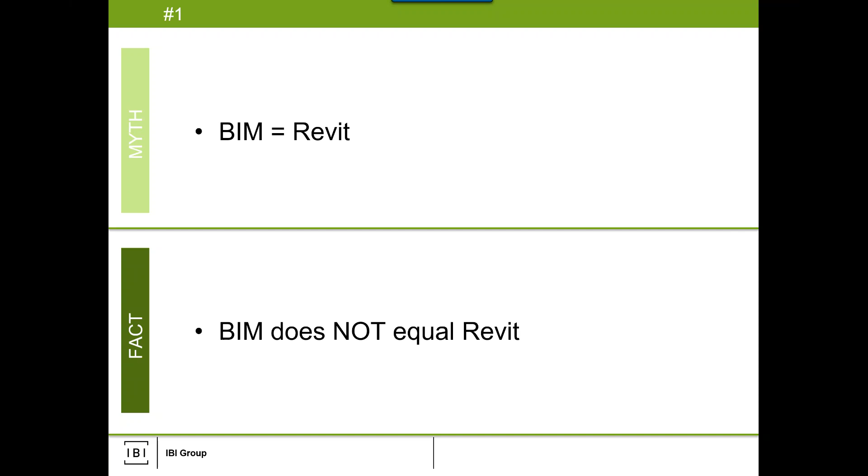So with that, we are going to jump into our first myth, and this is by far the most common myth that I hear all the time, and that is: BIM is equal to Revit. So all of these — I have 14 myths — it'll be myth and fact. And the fact is quite simple: BIM does not equal Revit, period. BIM never has equaled Revit, and it never will equal Revit. That's a very critical thing — if that's the only takeaway, let that be the takeaway. BIM does not equal Revit.

And some of the things, if you listen around your offices or the industry, you'll hear some of these. Did you install BIM? You don't even know what that means, other than — well, did you install Revit?

Well, then ask that. One of my other favorites, and I've worked in the UK many moons ago, the UK mandated Revit. That is the farthest from the truth. If you're interested in the UK BIM mandate, it's an amazing collection of documents under British Standard 1192. Give it a good read. I don't even know if it mentions Revit in the documentation, but I could be wrong.

But the mandate is the application of the BIM process. Learning Revit means learning BIM. And I'm sure we've all heard that in some form, where we say, yep, we do BIM because Revit's on the computer. Or, I took a Revit training course, therefore I know BIM. Can't do BIM because no one has Revit installed. BIM doesn't apply because we're not using Revit.

And I've heard that fifth bullet quite a bit, especially for non-architectural types of projects, which we'll touch on in a bit. The second last one was interesting because I've seen some RFPs that said, do BIM in some form or another, right? And the response was, well, we don't know how to. It's a civil project, it's a rail project, it's a transit project. It's got a whole bunch of components that we wouldn't use Revit for. Therefore the RFP doesn't make any sense, because of that immediate association of BIM equaling Revit.

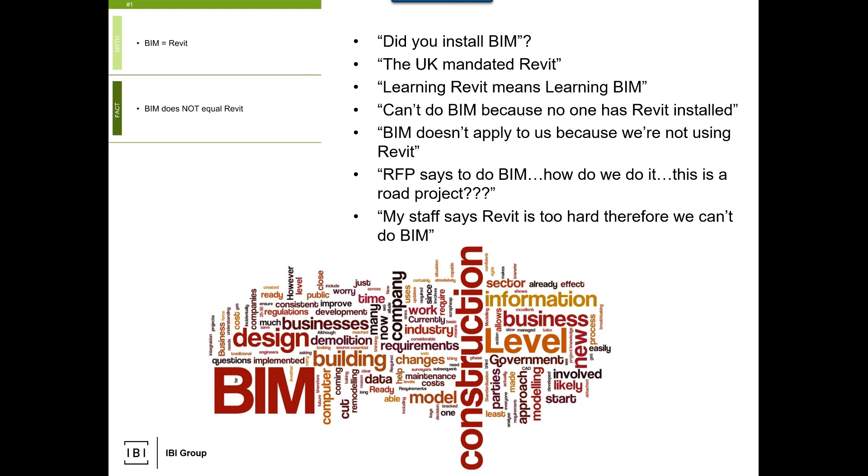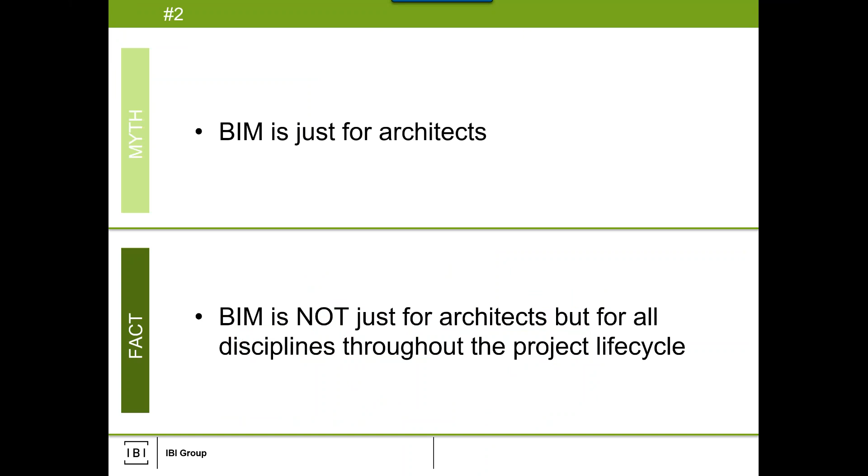Myth number 2: BIM is just for architects. So it's not just for architects, but for all disciplines throughout the project lifecycle. What we've seen is that probably around the 2003-04 range, the term BIM was coined and picked up quickly by the architects. So the AIA sent out its first BIM documents.

Architectural firms were the first to kind of apply the process, and Autodesk, with their Revit application, jumped on the BIM term. But of all the images I wanted to find, I thought that image of a model kind of encapsulates every single possible discipline that can be infused together and forced to collaborate. And that's in a building space, but that's everybody.

So civil engineers would automatically assume, well, BIM doesn't apply because BIM is about architects. And you can imagine the effect that would have if you're planning a project, or there's expectations for the delivery of information models pertinent to those other disciplines.

Proposals mention BIM, and PMs assume it's just 3D for architects. And I've seen that on some mass projects throughout the course of my career, where even building engineering would say, well, no, the BIM deliverable just applies to the architects.

And then you get into linear infrastructure, whether it's water treatment, roadway, bridges, et cetera. It's the complete ignoring of the fact that there is a BIM process to be applied, or there's a need for some type of intelligent turnover, because of that automatic association of 'it doesn't apply to my discipline.'

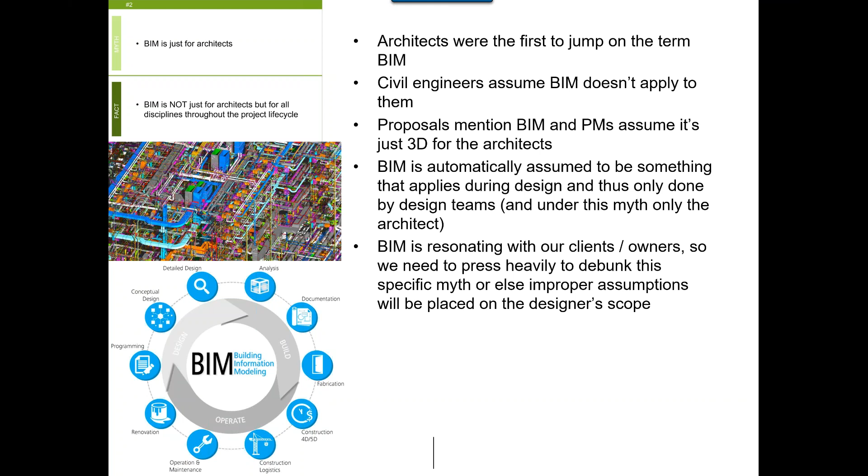So that's the main message of this myth: that BIM is not just for the architects, but for the collection of all of the associated disciplines that would have an impact one way or another on the content or the items that are being designed and fit together.

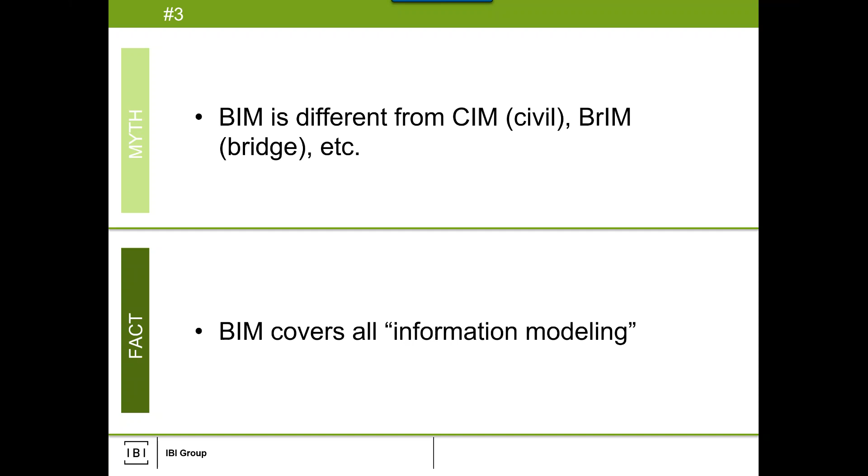BIM is different from CIM, BrIM, etc. BIM covers all information modeling, and I've combated this for a decade plus. The industry has haphazardly created acronyms when dialoguing about BIM, and that's only a small collection. Bridge, transportation, assets, facilities, civil, PIM being piping or plant—I've also heard it being process or project. I've heard structural information model, mechanical information model, et cetera, et cetera.

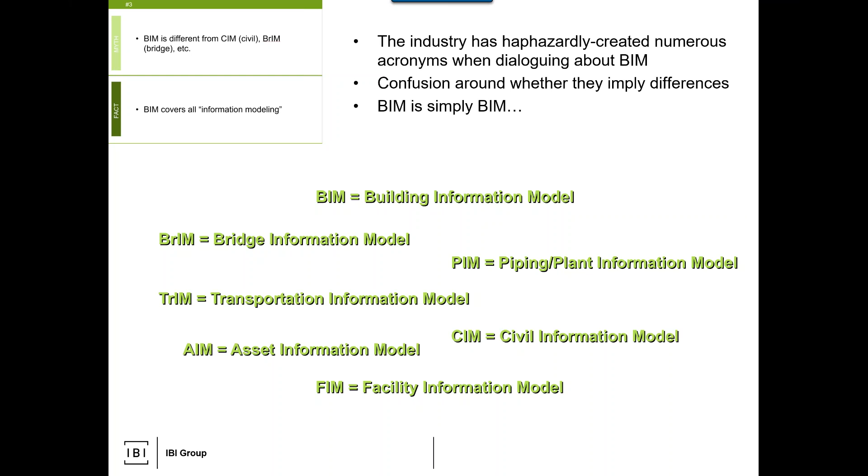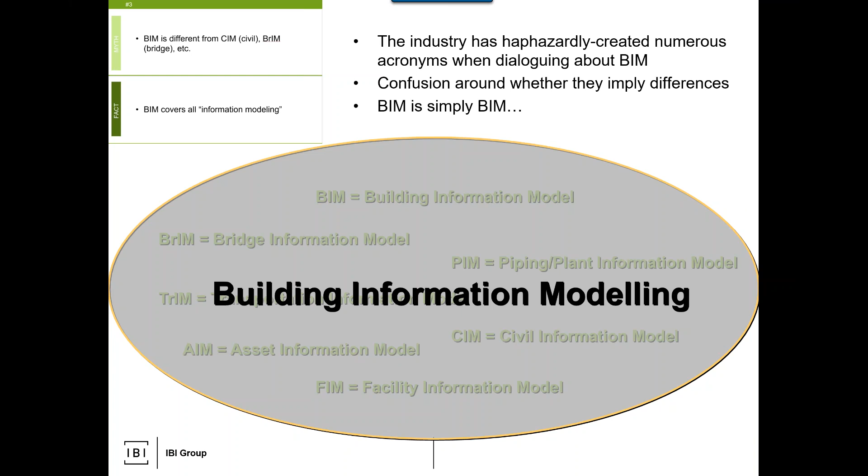And it all stems out of the previous myths where, well, if BIM is just for architects, we need our own acronym that talks about our discipline. At the end of the day, it's the verb of building information models, that's what it is. Information models cover multiple assets that come together as a whole, whether you're designing buildings, linear infrastructure, healthcare, hospitality, education, houses, transit stations—a bunch of stuff that comes together virtually, with a bunch of disciplines working together. A lot of the confusion has occurred, and I've seen this going to RFPs: the RFP says BIM doesn't apply to us because BIM is just for architects. So debunk that myth, please—it's the action of information modeling.

On that note, we lead to this one: BIM equals building information modeling and thus just focuses on buildings. Again, it's the action of information modeling—creating information-rich models for any asset that we may design. I'm using the term asset, use asset, component, thing, anything you see when you look around the space you're sitting in today, anything you're designing in any of our projects. There's an action of creating information models that come together.

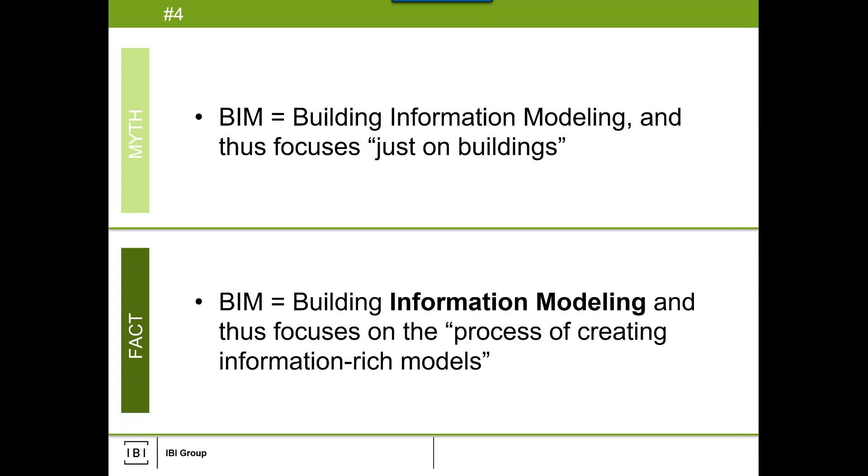Now I pulled some examples over here. When I say BIM is not just for buildings, it's not just—so it could be for buildings, and I've got two building examples there. Great, but it's everything else you see here as well. And I need to stress that, because it is your conduits, your cable trays, your mechanical, it's your civil surfaces, whether you're in roadways, roundabouts, rail corridors, etc., subsurface and at surface. It could be your linear-based assets scattered horizontally throughout an alignment. It could be plant assemblies.

With the plant assemblies, I included at the top right intelligent schematics. In the world of heavy industrial plants, not only do you have your actual 3D virtual model, but you have associated intelligent schematics tied to the model. The reason for that is there's a lot of stuff in the plant models—other stuff you won't ever model, like little level indicators and pressure indicators and a whole bunch of tiny little things that need to be accounted for as an asset because they cost thousands upon thousands of dollars.

All of this, and then in the middle here we've got the point cloud—so existing conditions modeling, whether it's scanning for points and uploading those into one of the other applications, or condition modeling throughout the life cycle of a project, to compare what's being built against what was actually modeled. All of this stuff is information models. It's the verb, the act of creating all these various types of information models, and the process of pulling them all together for coordination and delivering whatever we need to deliver as an output at whatever stage of a project, which could include drawings, but a whole bunch of other stuff too.

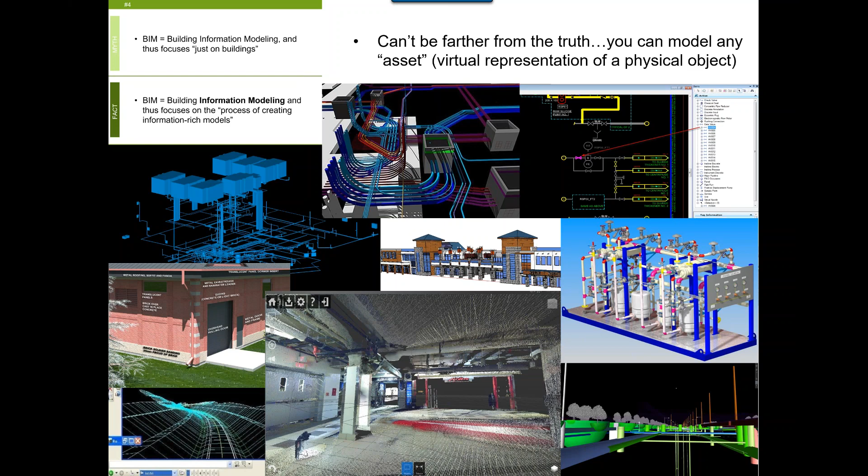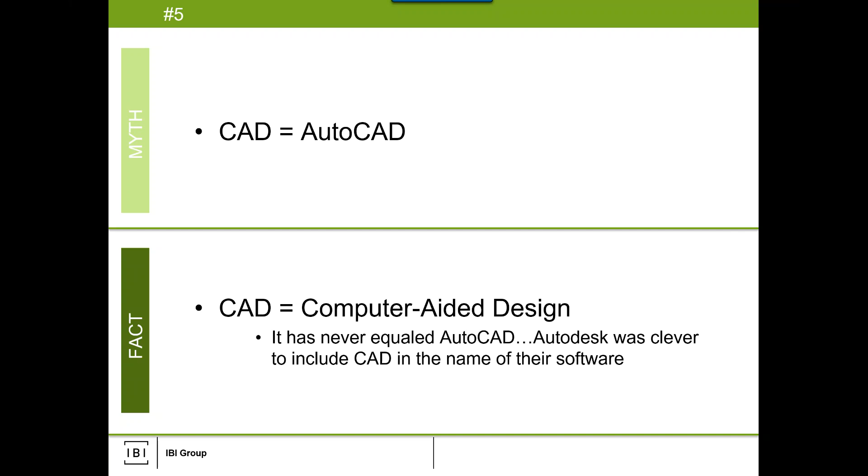CAD is equal to AutoCAD. I've got to give Autodesk a lot of credit here because their marketing engine was powerful when they did this—this was early 80s. They made the application AutoCAD as a CAD application, and they've ingrained into the industry that CAD is equal to AutoCAD. It's not true—CAD is computer-aided design. So what we've heard, and that quote there, 'we don't want to do BIM because we use CAD'—meaning, if you debunk the myth, 'we use AutoCAD, so we don't want to do Revit.'

So that's myth 1 and myth 5 combined together. A 2D CAD deliverable means we have to deliver in AutoCAD—it's not true. We've got many projects where the 2D CAD deliverable is something else. So I mentioned Autodesk's cleverness: they put CAD into the name, branding themselves the way Kleenex branded to tissue, Xerox branded to photocopying, iPhone to smartphones, you name it, right?

Computer-aided design has been around for about 40 years. I don't know if that's wholly accurate, it might even be understating it. It may not have been industry standard 40 years ago, but it's definitely been around. If you look at the bottom left, it's always been that process of applied computer-aided design that helps us conceive, design, develop, and either validate when it's being built or send to manufacturer. That's the CAM term. From CAD to CAM, computer-aided design to computer-aided manufacturing, there's been a lot of processes that were built in and workflows that allowed us to build tools like AutoCAD and deliver to manufacturing plants.

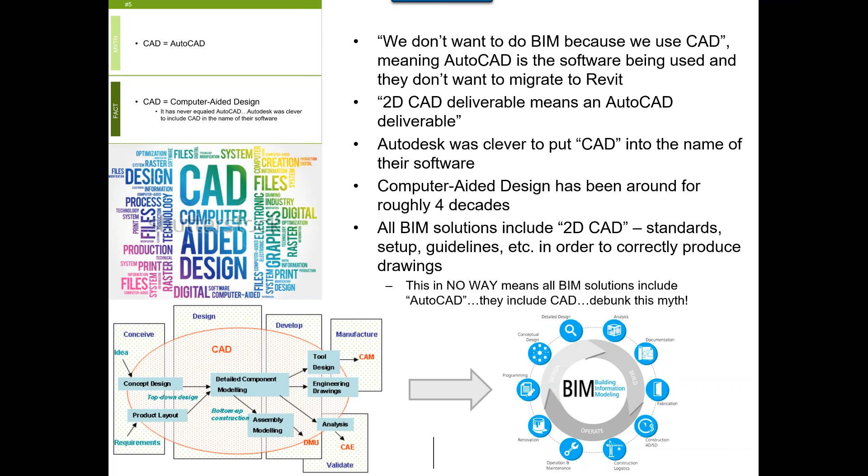So where I'm cutting the wall, it's darker than the stuff I'm seeing in the distance. That's just fundamental CAD, which was built upon fundamental paper drafting on the board. So those things are still built in, but that tie and connection to CAD and AutoCAD really has skewed how we go about building our approaches, building our deliverables, or just understanding the needs of our clients because they may state CAD and by default we jump to AutoCAD. In the same way they may state BIM and by default we jump to Revit. All of a sudden Autodesk is sitting there laughing because we're reading RFPs thinking immediately it's a Revit AutoCAD project when it might be completely the opposite. Might.

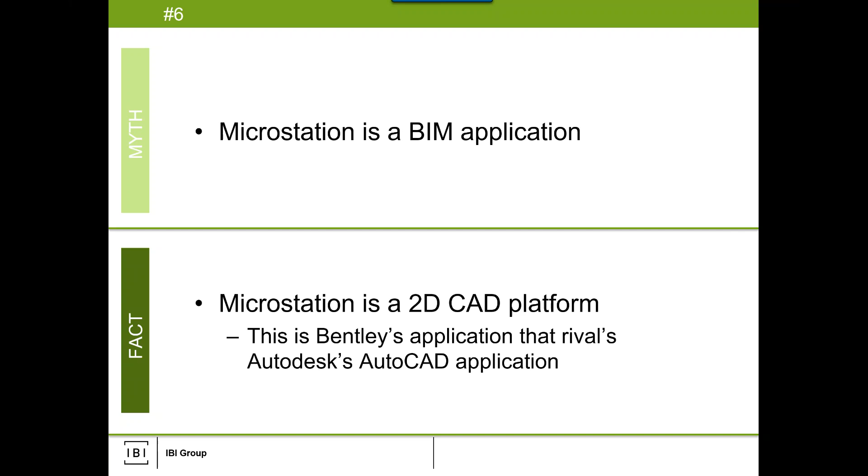MicroStation is a BIM application. So the fact is, on this myth, that MicroStation is a 2D CAD platform. This is Bentley's application that rivals Autodesk's AutoCAD application. So debunking myth number 5 leads into this myth. MicroStation is a CAD application. AutoCAD is a CAD application. We have 2 CAD applications.

We have to be cognizant of that because we have agencies, DOTs scattered across the US, several municipalities scattered across Canada. I know there's major agencies in Australia, in Singapore, and Dubai has some agencies that require a MicroStation DGN 2D CAD file, the DGN file format as a deliverable, not DWG from AutoCAD. So keep that in mind. If there's a CAD deliverable, ask the question to our clients: what do you want? If the client doesn't know, great, we can recommend, we can help, we can dialogue, all that good stuff. But if the client knows, their response should be one of DWG or DGN, and then we'll know exactly what we have to do to plan our deliverable.

The myth: we do MicroStation, therefore we do BIM. Thinking BIM is Revit and MicroStation is BIM, we have something else. So that's a statement riddled in myth. I want to debunk that right away.

Autodesk and Bentley are competitors. Autodesk is far more market friendly because they're out there and people know them better and they have a greater market share. Bentley is usually in the larger infrastructure, Department of Transportation type agencies where there's a lot of linear and vertical mixed together, but it is out there, and some of our transit architecture has seen DGN as a deliverable requirement.

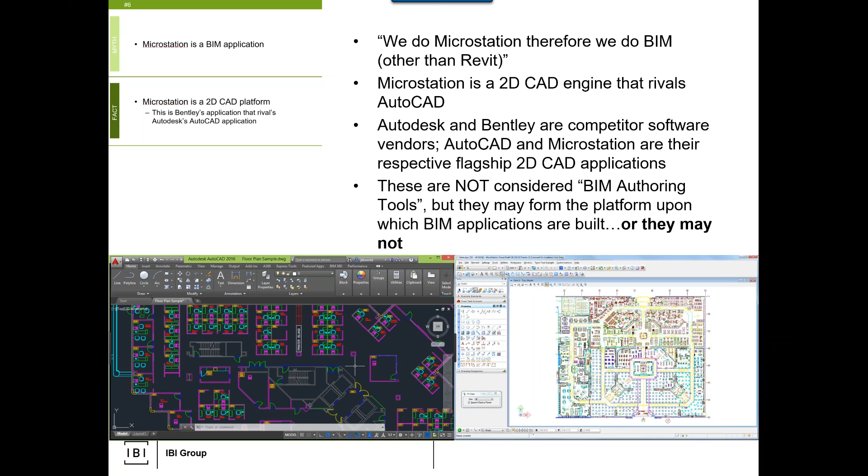The other myth, coupling onto this one, Bentley Systems has no BIM applications. This has come up when answering RFPs, and a couple have said, we want to use Bentley BIM. Well, we can't do that because myth number 1, BIM is Revit, therefore the RFP makes no sense. Or myth number 6, Bentley, oops, that means MicroStation. That's all they got. MicroStation doesn't do anything like Revit. Well, no, because you're not using the right tools.

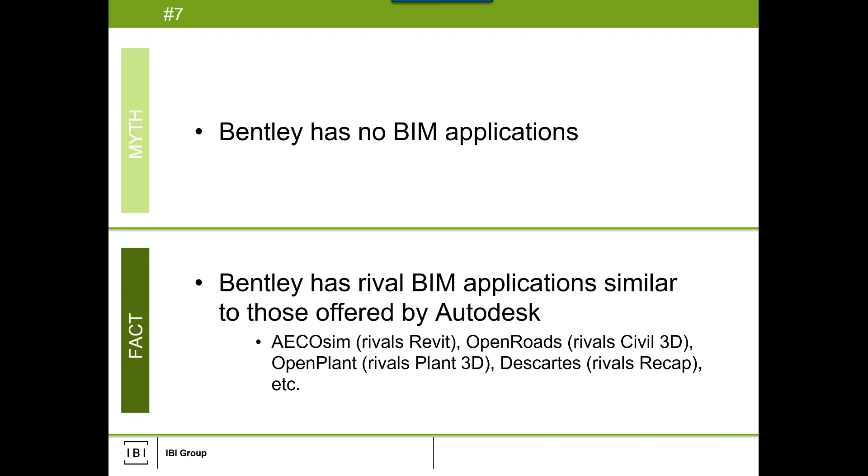If the takeaway of this session, or one, I'm hoping there's at least a takeaway for each myth, but if one takeaway is, oh yeah, Bentley, Brent muddled off a whole bunch of stuff about it on that myth presentation, good enough. Contact us. Let's see what the requirement is for the projects. Let's see how to address it as an IBI team.

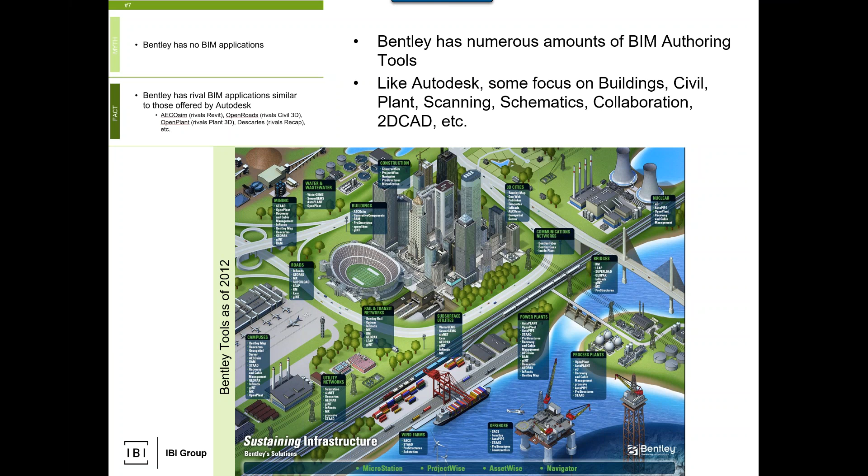We may be teamed with an external entity that wants to use these building applications, or maybe one that wants to use these road applications. Sure, let's see what they are. Let's see how they come together, and let's see how to build the solution. That's the critical thing. We're about finding the right approach for projects and making sure that we're accommodating the needs of the project, the client, and ourselves.

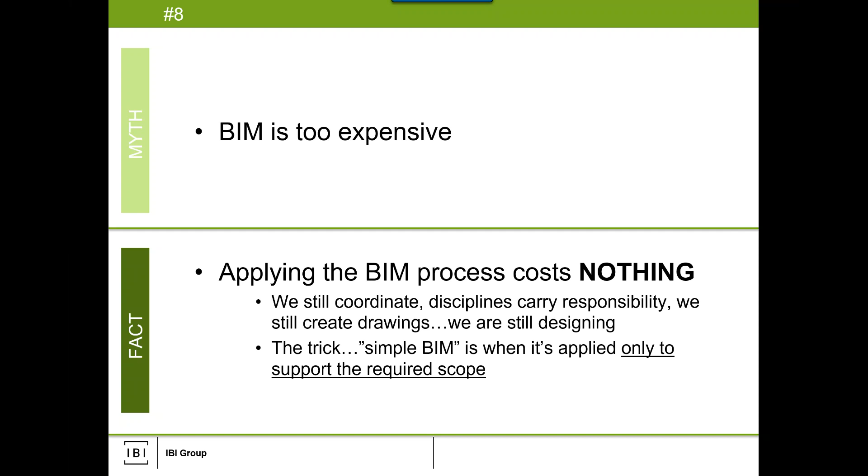So when I describe this fact, I'll say applying BIM as a process doesn't actually cost anything because we still have to do what we need to do. And I keep saying there's a difference between simple BIM and doing absolutely everything possible that's asked of us that we don't need to do, which increases our scope, et cetera. So if I'm just doing BIM to do what I need to do, and I've learned my application, of course it doesn't cost more, right?

So this is where I'll use this stuff here to talk through a bit. The fundamentals of project delivery don't disappear because we're applying BIM. And that triangle, we were all in those BST courses: scope, schedule, budget, resources, and scope. I loved how they describe it, you knock off any one of those vertices, the triangle crumbles. So if I'm doing BIM, what tends to happen is we tend to do more and more and more without asking for more schedule or more cost. And that breaks project delivery.

What we need to do is get our people trained on what's required for the fundamentals so that what they need to do anyways becomes more efficient. We've done a lot of work trying to normalize our training. Using Revit as an example, but the same would apply for Civil 3D, inroads, Plant 3D, etc. If I'm training someone on how to use Revit, I want to train them on what they have to do and show them the efficiency around it, not train them on everything Revit the application can do, bombard them, overwhelm them, so that the declaration becomes it's not going to work because it's too complex.

Ask, what are we BIMing and why? And if you can't answer that question, stop and get answers. Engage all the resources we have available to help you get that answer.

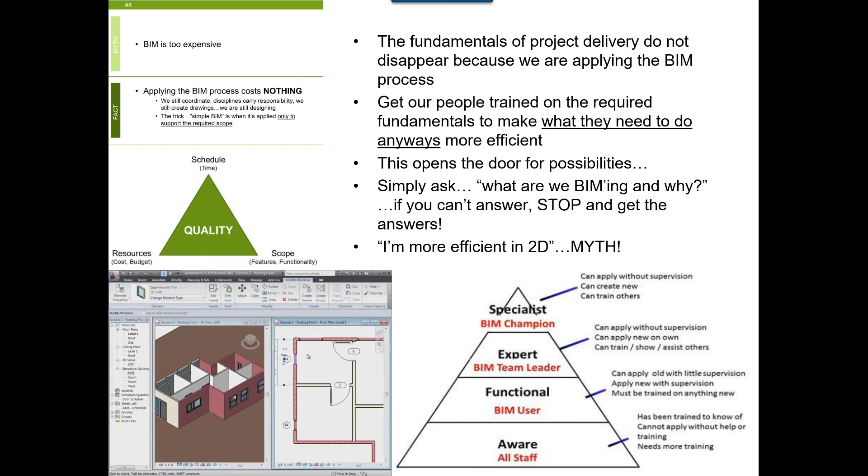Well, no, it doesn't cost extra time and effort for me to, quote, use Revit, if I'm using Revit, or use Civil 3D, or use OpenRoads. But now that I'm doing this and I'm more efficient, now let's do more, potentially. And that leads to the next myth.

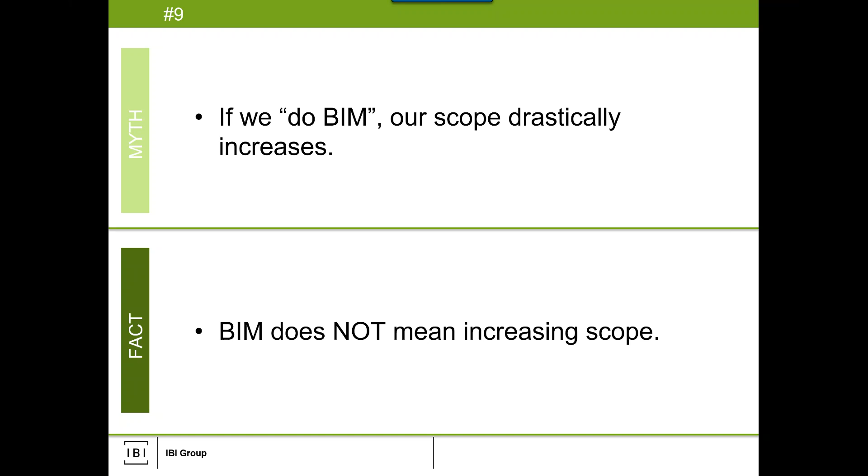If we do BIM, our scope drastically increases. Doing BIM does not mean you need or must or have to increase scope. And it's a trap that we've fallen into, and often it goes back to some of the previous myths.

So look at the third bullet, we'll jump right there. Since the myth is architect does BIM, coupled with BIM is Revit, therefore the architect has to do everything. That's it, right? Because it's only the architect does it all, and we're not going to pay more because we've listened to all of the vendors and all of the propaganda about BIM efficiency. So BIM makes the project as a whole efficient. Now let's make the architect do all the work.

So let's combat that, because that's a little bit of rubbish there, and we have to deal with that. Again, scope, schedule, budget comes into play. In the world today, because BIM is resonating throughout the industry, it's riddled with myth, riddled with some lack of capability, and riddled with a whole bunch of experts as well.

On our DB and P3 projects, contractors know what BIM, the value of BIM is. And in fact, when you look at this wheel of BIM down at the bottom here, the orange is what we as a design firm would gravitate to. Everything else has a greater benefit for the contractors than it really does for us.

So they gravitate, they see the value, but the more they, as the P3 contractors or our client, can get us to do, or sneak into our scope, or get us to agree, the better it is for them. In the same breath, in design-bid-build, contractors want more, but they're not our boss, right? So they complain up to our collective common client or owner.

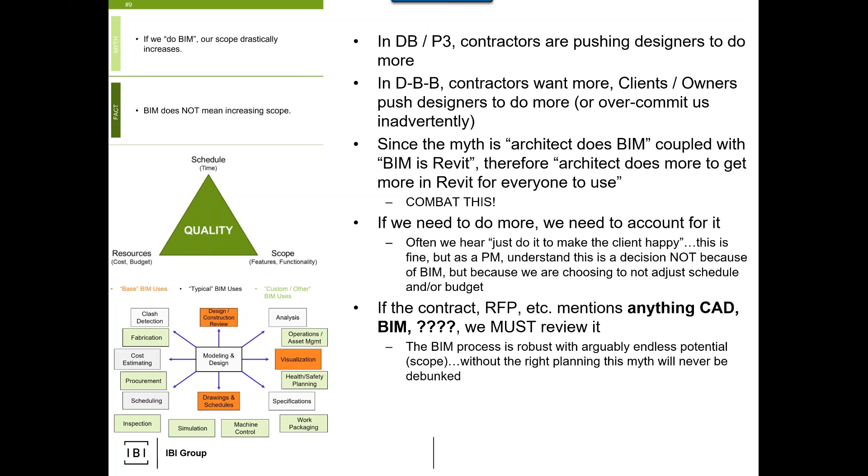Often we'll say, let's just do it to make the client happy. Fine, but we have to account for that fact as well - we are choosing to erode our margin to make the client happy. It won't erode it too bad, we'll still make money, we'll have a happier client, and we'll win more work. That's a good story. But if we're just doing it to make the client happy and we erode our margin, and then we get into negative variance, so we start losing money, and the client's kind of not too happy anymore - what was the point? So just account for the fact that if scope is increasing, we know it, and we're either adjusting or we're consciously deciding to enrich what we're doing.

And then lastly, we are doing more BIM, but it's depleting our project budget. So as I've just been saying, if additional scope is defined, adjust schedule and budget. And some of the items that I've listed here - keeping a happy client, that's one thing, but oftentimes, especially in the P3 type projects, our contractors are driving us to run weekly meetings, do full clash reports.

Document them, document resolutions, the communication of the clashes, etc. Some of these items, it's a struggle at times because the contractors will say to us, well, don't you coordinate anyway? And our answer will be yes. And then they'll say, well, then why is this extra scope? Well, we coordinate - now you're asking us to run processes, document, et cetera, et cetera. So even if it's a minor increase, or if it's an augmentation to what we would normally do in the design process, we should account for it.

We have requirements for file turnover, so 2D CAD file translation. So there I'm working in, let's say, OpenRoads and Revit, and I need to deliver in AutoCAD. There's a process, we've got to do something. We need to account for that, or have that built into our initial budget.

Creation of advanced visualizations. Often you'll hear, well, you have a model, just make it look pretty and deliver it. And then our Viz teams are pulling their hair out trying to not eat into a project budget that was never in existence to begin with.

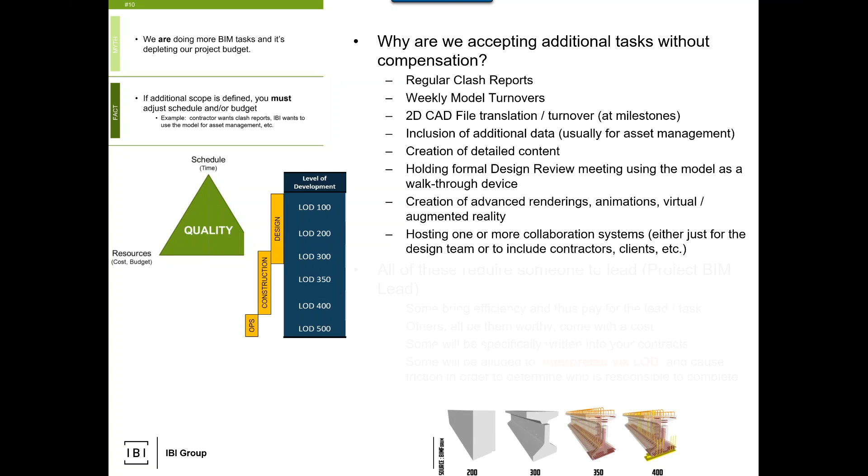Collaboration systems - we're hosting something in the cloud, we're hosting something internally, we're trying to grant access to entities that are not IBI and getting us all to share and making sure data is moving to and from sources and targets. That all takes time, that all takes somebody to manage. As I mentioned, everything - that's somebody, this project BIM lead, I have a myth about that afterwards. Sometimes we're increasing efficiency, sometimes there's something that needs to be paid for.

Just wanted to get to that last bullet, so I don't dwell on everything here, but this LOD - so anybody who's worked on proposals or interacted with contractors and you're asked to do a higher LOD, do LOD 400, LOD 500, et cetera, et cetera. That's level of development defined by a North American BIM standard. Now, if you're listening from across the world, there's different standards that are being built in - different in the UK, United Arab Emirates, they kind of fuse together the UK and North America. At the end of the day, it's how much are you modeling and for what purpose?

So I kind of divided it into design, construction, operations, and you can see along the bottom it goes from my beam as a box, a simple rectangular prism, to my beam being something far more complex, showing rebar, et cetera. Know what you got to do as a designer, understand what the contractor may want, and have the appropriate dialogue when you feel your scope is being increased. And I'll always say, if you go back to the drawing board or the days of 2D CAD, if you would never do it then, most likely from a professional liability standpoint, we probably still wouldn't do it now - yet we can facilitate the interaction.

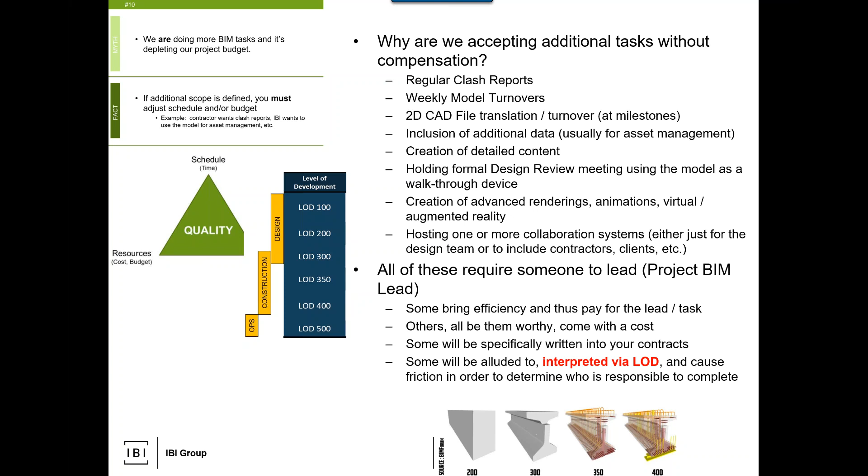Everything I just said here happens with a BIM execution plan - just planning. What are we BIMing? Why are we BIMing it? Why are we asking to do more? How do we say no? That's what this is all about - identify why, plan, execute, and do a quality assurance support check.

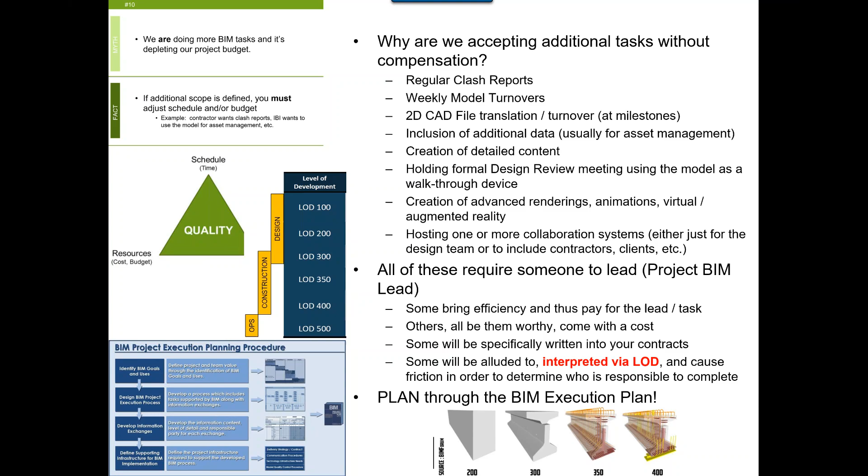There's no support for us to use BIM on our projects. So internal to IBI, design technology has been built to support the application of BIM for IBI.

I remember on my first or second day, someone on a call said, Brent Mowdy just started, he's quote, our new Revit guy. Nope, I am leading BIM. And there's a big distinct difference, especially after those first 10 myths.

Standards, template, content, organization of training, support, mitigation, most critical, helping to define the BIM scope on a project. The BIM scope may be as simple as it's a building and we're using Revit and this is what we're doing, but defining that BIM scope, be very clear.

Our mission of design technology is to basically standardize what we do for us to then in turn optimize how we do it, leading into more downstream business models, asset management, et cetera. That could be a session all in itself.

We have 5 main global portfolios, as I call them, that govern BIM everywhere. Basically, it's stuff like I have to install Revit. Well, installing Revit in North America, UK, India, or anywhere else in the industry, it's going to be consistent.

We then have regional leads. So if you're in an office, I have a regional lead for each region. We can go and connect, help to understand your client, interpret RFPs, connect to resources, connect to our network.

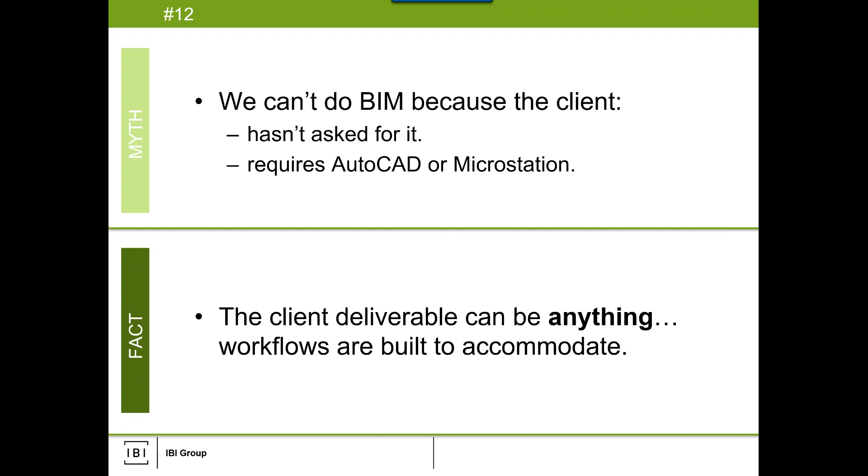That's the mission. We can't do BIM because the client either hasn't asked for it or requires, I put AutoCAD or MicroStation, but usually it's, quote, requires CAD. So the fact, the client deliverable can be anything. It quite honestly doesn't matter, okay?

So just think about that. A lot of Alberta infrastructure, for example, when they've started to build their BIM standards, they're asking for the open BIM turnover as a minimum requirement. And a lot of agencies around the globe are hitting that as their main turnover need. And then of course there's the PDF turnovers, etc.

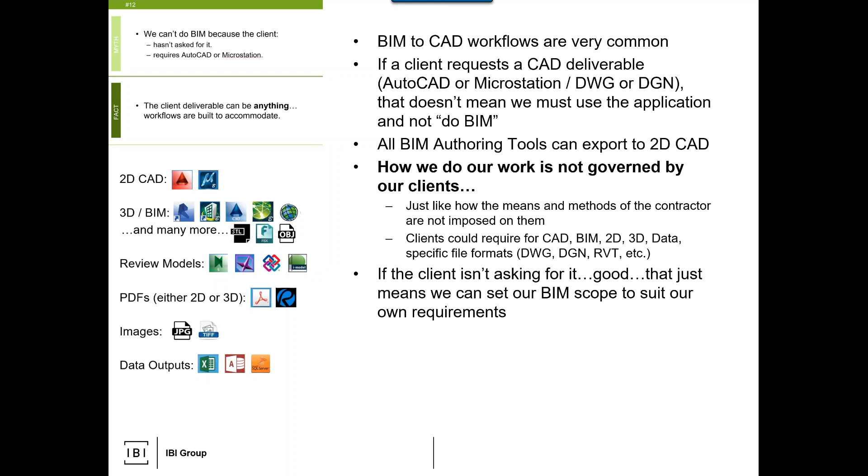Okay, just doing a time check.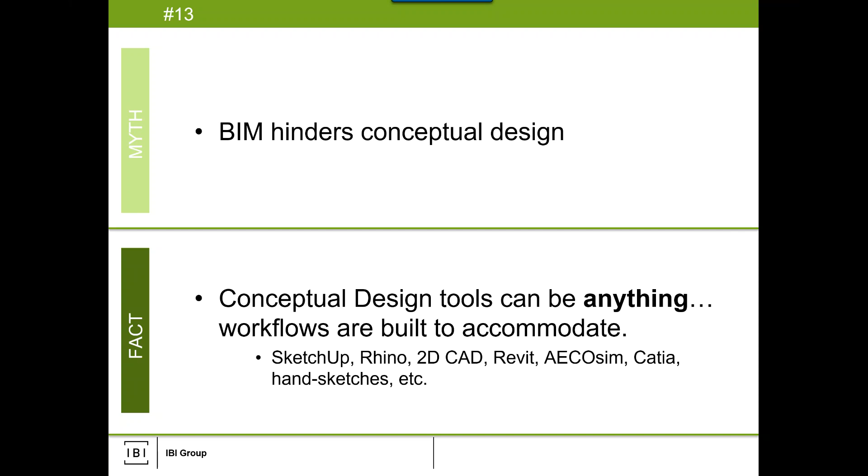Two more. BIM hinders conceptual design. This is similar to the previous myth, which was about the end output at various milestones. This one is about the front end. Conceptual design can be anything, as long as we're critical to the fact that there are workflows to get from a concept tool to the BIM authoring tool. I threw in a couple of concept tools down there. But what if this is your concept?

A sketch on paper. So the message is the BIM process should never, has never, and we have to make sure never does, inhibit or restrict the way you conceive of your design. Whether it's a streetscape, a public space, a building, an interior, it doesn't matter - this is concept design. What we have to be cognizant of is that in the same method as I would take this sketch, open up a 2D CAD application like AutoCAD or MicroStation and start making plans, sections, elevations, in the same breath I would take this sketch and get into a BIM authoring tool.

Now the hard part of the challenge is maintaining that workflow. You're sketching, you have this freedom to sketch - I'm going to stick on paper here for a second - then I go off and start modeling. You want to update your concept, so you sketch it, and I'm going to have to update my model. There has to be an understanding that there is a workflow.

If you tell me to go work and start getting in depth and detailed, and then you go and change the concept, I may rework, I may have tricks. If you go back to that pyramid, if I'm a BIM specialist, I'll adapt. If I'm somebody brand new to BIM and brand new to this authoring tool, I might start to get overwhelmed thinking, oh my God, you changed everything, I now got to start from scratch. Hopefully I reach out to experts to say, how do I address and augment this?

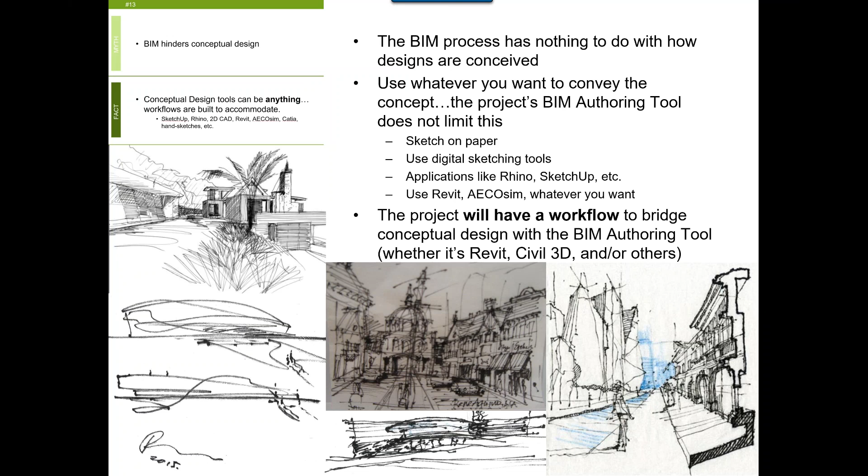The other thing, and I'll pull these in now, we're in the world of digital concept art, or digital concept design. Any one of these images could be the source of a concept design. It could also be the source of something I may continually be upgrading just to quickly identify, change, and augment the idea. I, the conceptual architect, have to be cognizant of the fact that there's a workflow to get to and from full BIM authorship and where I'm working on the concept.

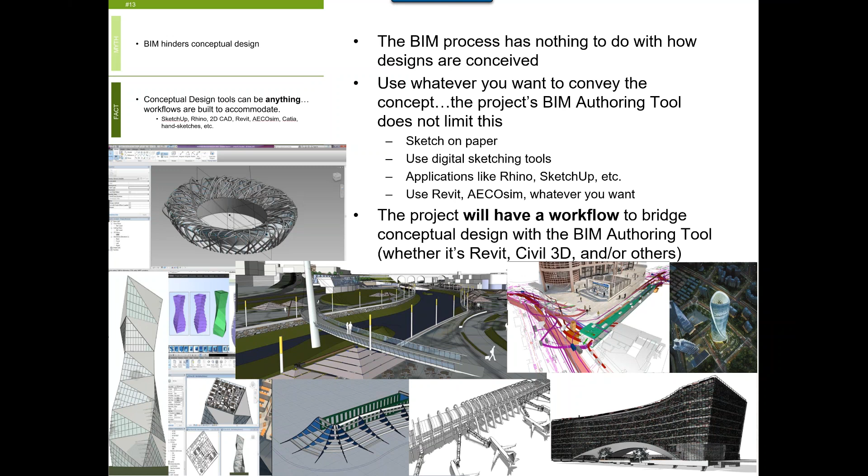Tools like Revit, Vectorworks, AECOsim, and ArchiCAD that are BIM authoring tools actually have conceptual design tools built inside them as well - whether it's conceptual modeling and massing tools, or adjusting scripting entries on tools like Dynamo, Generative Components, and Grasshopper that directly affect the geometry, which then directly affects the modeling as it continues. Just be cognizant of the workflow - I think that's the only takeaway. BIM does not hinder how we conceive our designs. Hopefully we get to the point where it's actually enhancing them.

And then the last myth: the CAD BIM lead is a new role. I've heard that not just here, but over the last decade. I don't care what you call it either - the role has been in place for at least three decades, if not longer, with varying names: CAD manager, CAD lead, interface manager, whatever. On all IBI projects, somebody is the go-to person, right?

What design technology is trying to do is find out who all these go-to people are. Let's get them all inside our network so we can discuss and make sure there's awareness of workflows, best practices, standards, and all that good stuff. Somebody needs to be that point of accountability. If something breaks, or we don't know what we're BIMing and why, or who we're sharing our information with, or what the project deliverable is - anything - who do I go to?

What I've seen happen is, let's go to the practice director, maybe go to the global sector lead - they might come to myself - and the first question is, okay great, so who's my person on the project? And it's one big incredible circle right back to the person who asked the question, until we find out who's helping to lead and run that project. So keep that in mind.

Doesn't matter what it's called, right? We have information on what it means to be a project BIM lead in the industry, whether the term is BIM coordinator, BIM manager, BIM fill in the blank, whatever.

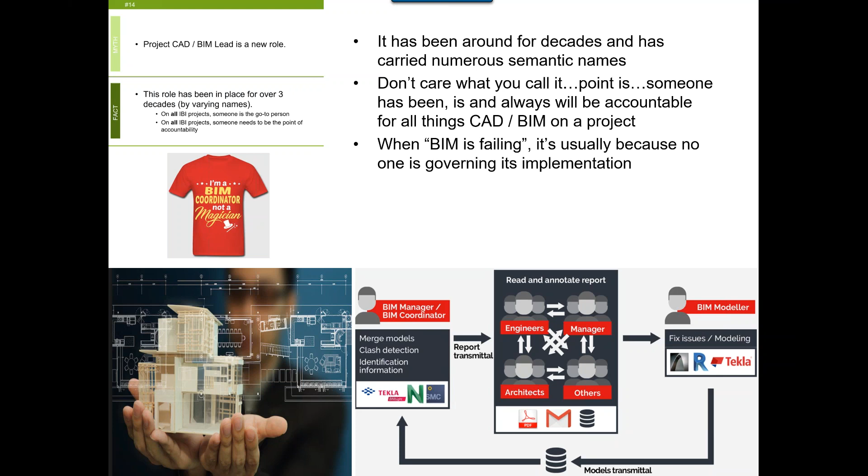Sometimes the modeler and the managers are the same people. Sometimes the architect and the BIM coordinator are the same, whatever. The point is that there's somebody who's accountable, that go-to person that's helping to mitigate, helping to make sure people are aware, and just helping to bring all that data together. So come the completion of a project, we actually have something that's fit for purpose, usable downstream, and actually worthwhile.

So summary of the facts there, I'm not going to go over them all, but at the top there, something at a presentation in China. If you think BIM is just a tool, it'll just be a 3D model, if that. If you think it's a method, you can start to raise your efficiency. But if you think of it as a concept and a process, you can really do anything with it. And that's the power of BIM, but you need to control it based on these myths.

Don't let the myths drive either your understanding or interpretation of BIM. Stick with the facts. And if you see the myths being used out there, call them on it. Ask the questions, or just get the clarification that what we're saying is what we mean to be said.

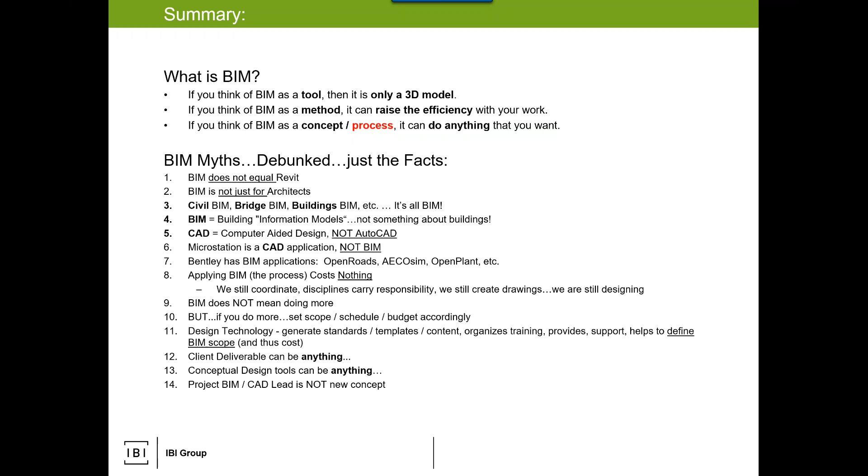If you listen to this and said, okay, great, that's a nice little bit of information, no more, no more. You say, Brent, I'd love a lot more, a little more.